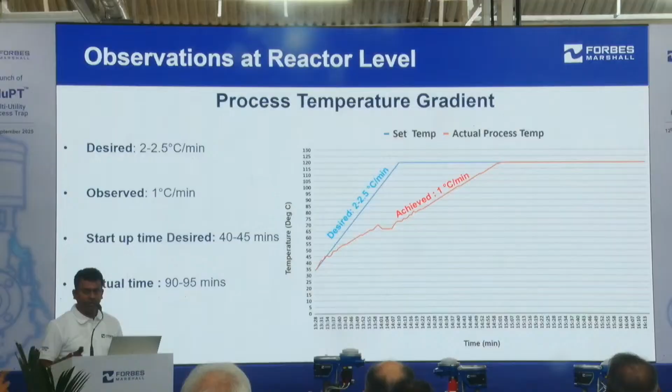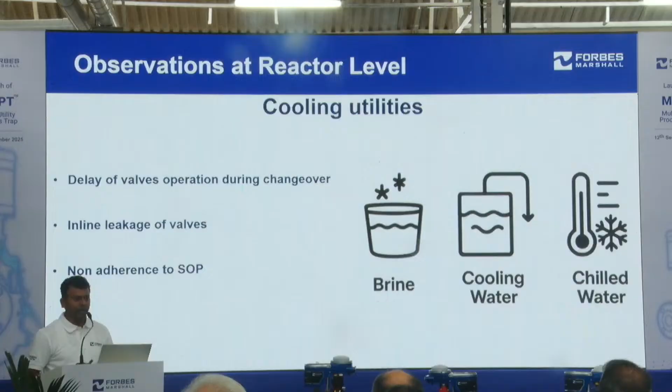As we know, the major cooling utilities for the reactors are cooling tower water, chilled water, and brine solutions. If there is any delay in the valve's operation during changeover, or any inline leakages in these cooling utilities, or also any non-adherence to the SOP, that all leads to contamination of the condensate due to earlier traces of the cooling utilities in the heat exchanger.

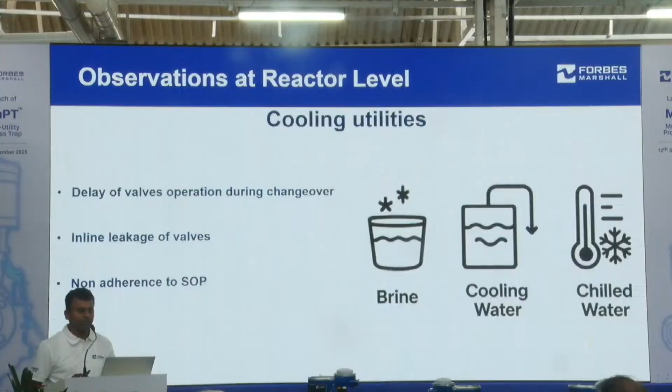When we ascertained all these TDS values of the contaminated condensate, it ranges from 200 ppm to almost 1000 ppm. That is what is varying, and that is what we have observed.

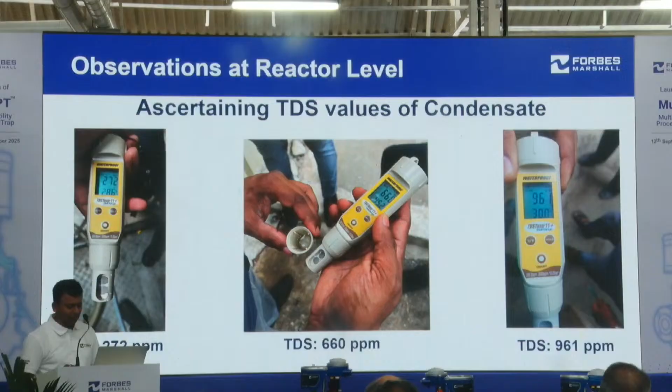Now, if we summarize all these challenges in multi-utility reactors: inconsistency of process temperature due to improper trapping, higher batch time or steam consumption, or draining of condensate to the cooling tower or the ETP, which results in a lower condensate recovery factor.

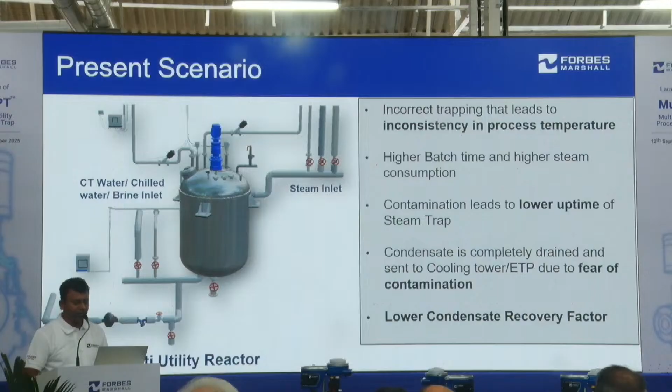Moving on to our solution, which has evolved understanding all these challenges, that is MuPT, which addresses the temperature gradient issues, enables achieving the desired temperature gradient, enables a higher condensate recovery factor, thereby reducing steam consumption by 3 to 5%, reducing the ramp up time, and finally reducing the ETP or cooling tower load.

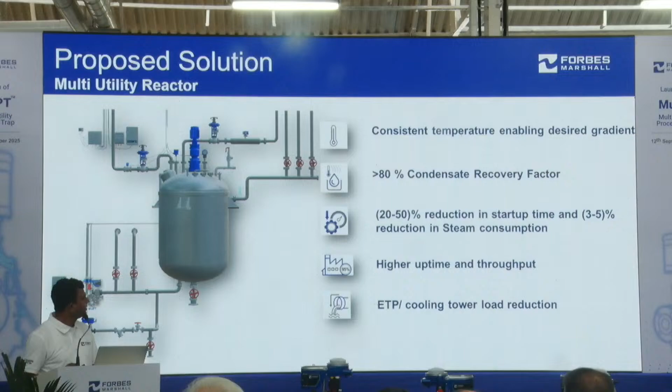Looking into this graph, it shows how MuPT, during this operation, diverted the condensate when it goes into contamination. If you see here, it started with a trapping mode.

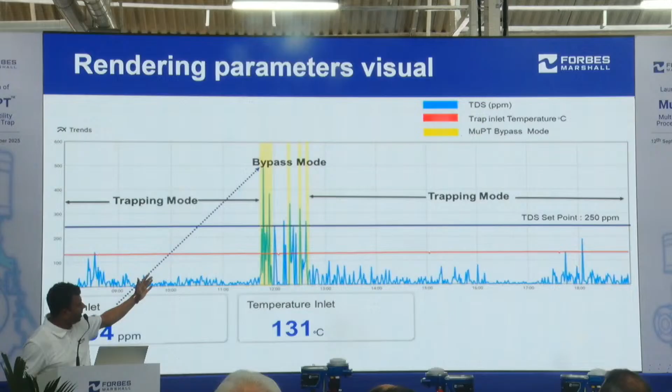When the TDS values cross the set point, which for this case was 250 ppm, it goes into bypass mode irrespective of the temperature, which is 131 degrees at the inlet of the trap, and it effectively diverts the contaminated condensate and then comes back to the trapping mode.

Now, talking about the features of MuPT: it starts with a patented design, the two orifice technology, which ensures evacuation of the condensate even during a warm-up or startup load, catering to condensate evacuation. It helps achieve the desired process temperature at the desired gradient.

The TDS sensor, or combined temperature sensor, and the three-way valve ensure diversion of the contaminated condensate based on conductivity measurement. The local LED indication shows the health and mode of steam trap operation. And finally, there's digital connectivity for 24/7 online monitoring and sustaining of critical parameters.

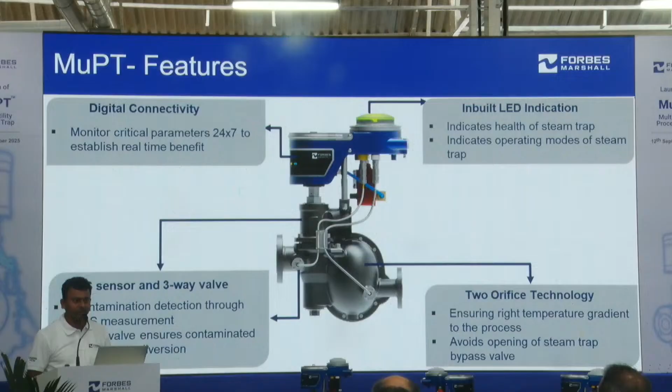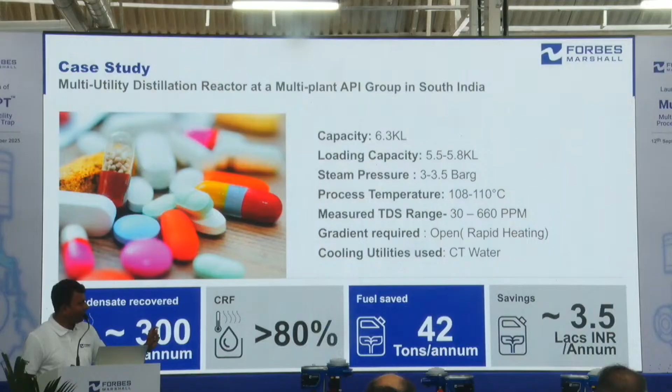When this prototype design came to us, we conducted extensive and rigorous trials across API and chemical industries. One result is from a customer in southern India, where we installed MuPT in one of their reactors, a 6.3 KL reactor. We saw recovery of greater than 80% of the condensate, even with a TDS variation from 30 ppm to 660 ppm, resulting in a reduction of fuel consumption by 42 tons per annum and monetary savings of 3.5 lakhs per annum.

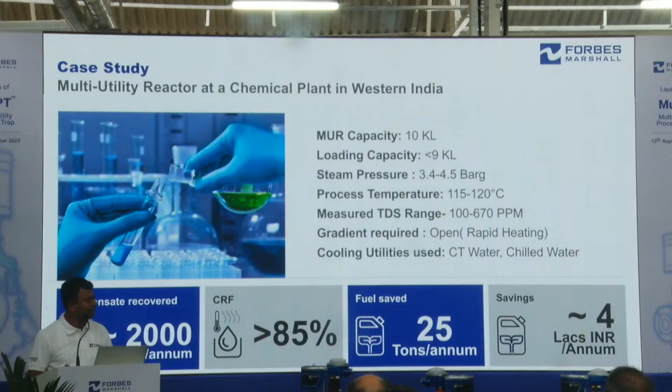Similar results were seen with another customer in Western India, a chemical customer, where we installed MuPT in a 10 KL reactor, and we saw similarly encouraging results with a higher condensate recovery factor of more than 85%. So thank you all.

Thanks for giving us support during this journey. We deeply appreciate your support and your engagement, and we ensure, let us ensure that...